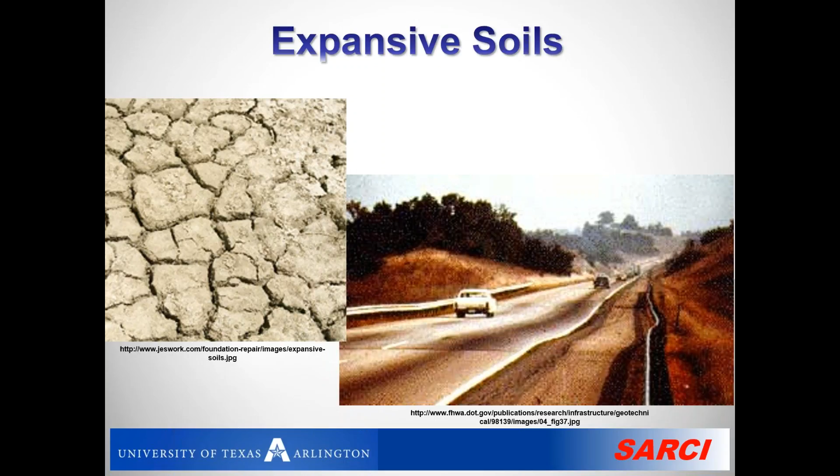There's one particular reason. They tried 2 or 3 times different stabilizations. Every second year, they had to go back and repair. So it's a big maintenance for the DOT and also local cities, because a lot of local roads come from that region there. And this one is from Middle East, but it's kind of common. Like in Dallas also, we have a lot of cracks in our homes.

In fact, there was a statistic I'm going to throw at you right now. In Dallas, if you look at the yellow pages, you don't have the phone books anymore, but still, if you look at the yellow pages somewhere, you'll find there are 60 plus repair companies in Dallas. And you go to New York City, you only have 2 or 3 people. So it will tell you how big a problem.

The biggest problem in Dallas is these foundation companies, they only have the company for 2 years, and then they say bankrupt, and then they go away. You won't even find them. So the guy who fixes your home, next year you want to go back because the problem came back, you can't even find him. He'll start with a new company again. So basically it's a big industry there. All this cracking, and anytime you have a crack, you lose like 20% of the value of the home sometimes. So it's a major issue.

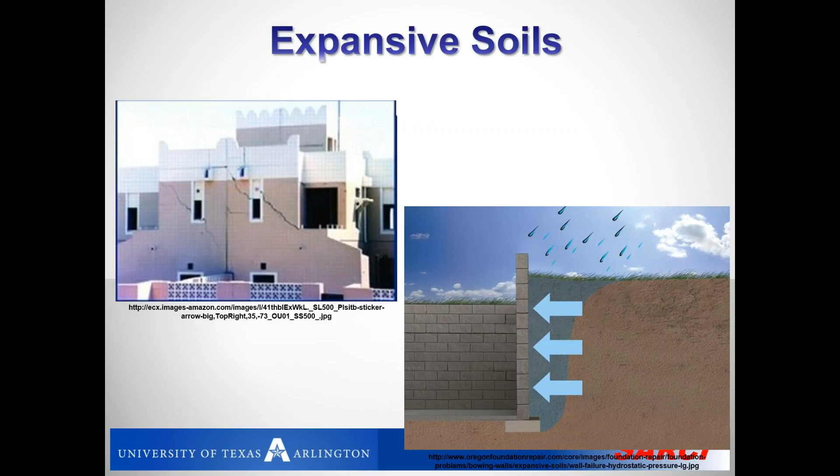And we deal with quite a bit of these home issues. And we also have the retaining wall. Sometimes the backfill is still expansive soil. If you have a cut area, you have a retaining wall that starts moving. And I'll show you a picture, and I'll explain how big this problem is. And this is all from our region. And I actually call them expensive soils, because anything you build, they're very expensive because of high maintenance.

This particular one is on I-30 outside Dallas. When this wall started moving due to this rain in the backfill, and then started swelling, the wall can only move in this way, so this interstate started buckling. And they had to shut down the whole system for at least a month or more than a month. Imagine one lane being shut down. You can see all the markings over there. This kept the traffic in the mornings for long lanes, and the amount of man hours lost is unbelievable. And this is common in our area. We have heavings like this everywhere.

And this is the area where I do quite a bit of research now also, the embankments or dams. First time when we get the rain, we have a lot of these superficial slope failures. And these are massive. These are not small ones. They actually take a huge amount of soil and then it comes down. And a lot of times they go back and push the soil. That's the only thing. It costs like $30,000, $40,000 to push back. In 2 years, again, they come back.

And a lot of earth dams, if you look at U.S. Army Corps, almost every year they have like 5 to 6 slides per dam in certain areas, and it's the ones where when you have a bad summer, you expect this problem pretty bad.

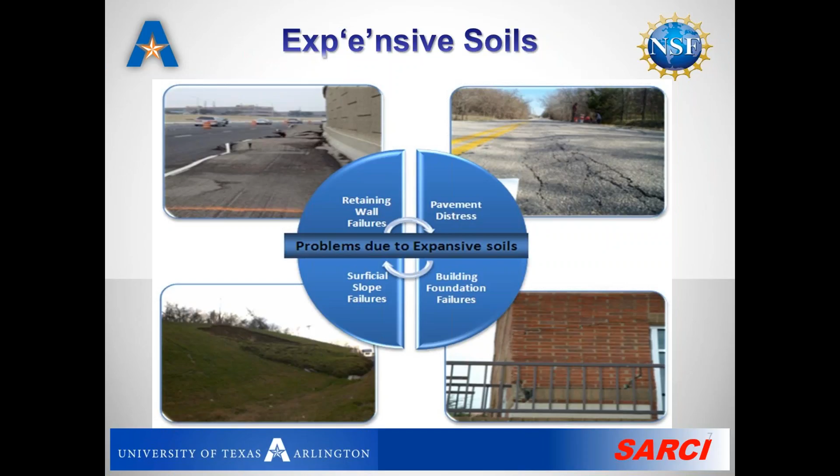And then this is again foundation crack. This particular building is a pretty new building. Within like a year, they have the cracking. So the damages from the pavement point of view, there are two types. The first one is, as I just mentioned, you have the roller coaster rides coming from differential heaving. Some area goes up, some area drops, so you have differential heaving.

The other one is this one, longitudinal cracking. This picture, I took for my project from TxDOT. It's Paris, not this nice Paris, but we have another Paris, I think my friend knows. And this Paris is pretty nice, but this road is actually four or five months old. You look at the cracking here.

We're talking about two inches wide, and we measured it just by poking a kind of a pole. We went down almost 1.5 feet. I'm pretty positive it went much deeper. This was during summer, extreme summer, probably sometime in July. And all along this are the trees. The water dried up and was taken away. The whole soil is cracking from the bottom up and started going up all the way.

And for this one, they had to repair it; the regional district spent quite a big amount to repair this road. And it's a pretty new road. It's a very common phenomenon here, having cracking coming from the bottom to the top.

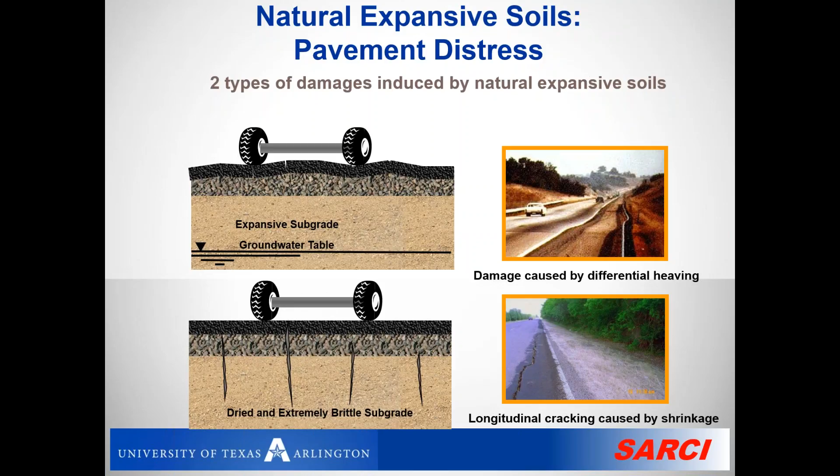So we were looking for solutions that are sustainable. We can show that if we provide a little bit of upfront cost, which is always a challenging role, can we try a new technique, a new material? Can we show you that the life cycle benefits are good, but more importantly, your maintenance dollars are less? So that's what we're trying to do. And I'm very fortunate. TxDOT has a good sustainability group. So everything that we do, they look for sustainable metrics. So that's where we actually address it.

In civil engineering, if you want to know what sustainability is, in these two fields we can directly identify it. Dams, energy structures, you can easily tell. But in terms of pavement geotechnics, it was a little bit difficult for us to explain what it is. But we are learning as we speak. And I was looking at the pictures behind there. You have the air pollution, NOx, and different things.

This is something I worked on with an air pollution group: every time I have a bad road and you shut down one lane, how much traffic air pollution, how many cars are idling, how many big trucks. I can calculate them and show a number, quantify how much pollution that's going to generate. They'll understand it. And actually it's helping me now to get projects.

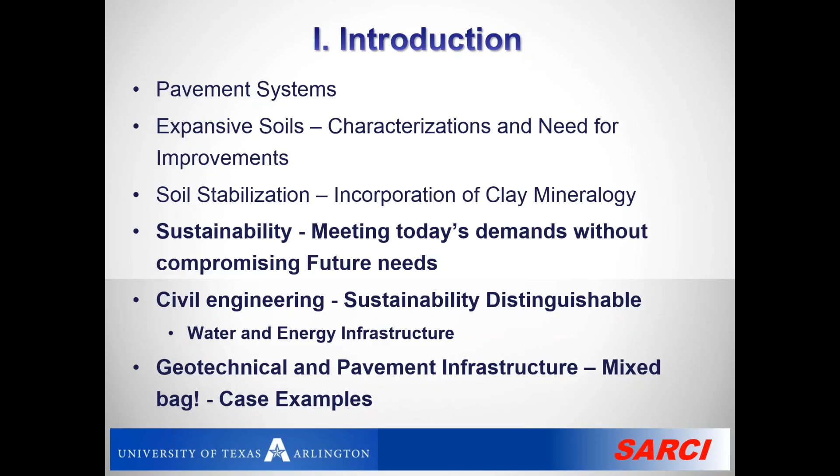So it's something you have to learn as we go, and I think some of you probably know. This is where in pavement geotechnics we need to show the benefits, and then we can get more projects. So the second item I'm going to start showing you, one of the first ones, is expansive soil underground. And this is a project we did. We looked at the expansive soils.

How do you know a soil is expansive? They look at the PI. They say high PI, soil is expansive. But I can show you some soils that are high PI that don't swell. So the PI-based characterization is really misleading. You can't always use the PI to indicate it, because soft materials also can have high PI. So what we did is we wanted to go a little bit more fundamental.

So NSF is the right place. We just completed this project last year. We tried to include unsaturated soil properties, which is the soil water characteristic. It's a study we did, and I'll show you some results here. So basically, instead of identifying it simplistically, only using PI, if I give them something much more fundamental, even though it requires additional testing, it will be much more sound.

So when I design a structure, I'm doing a couple of additional checks above PI. That will help them much more than just using PI. So in this study, we looked at the clay mineralogy, we looked at unsaturated soils. These things are already included. Pore size we also tried, and I'll show you a little bit of information on that.

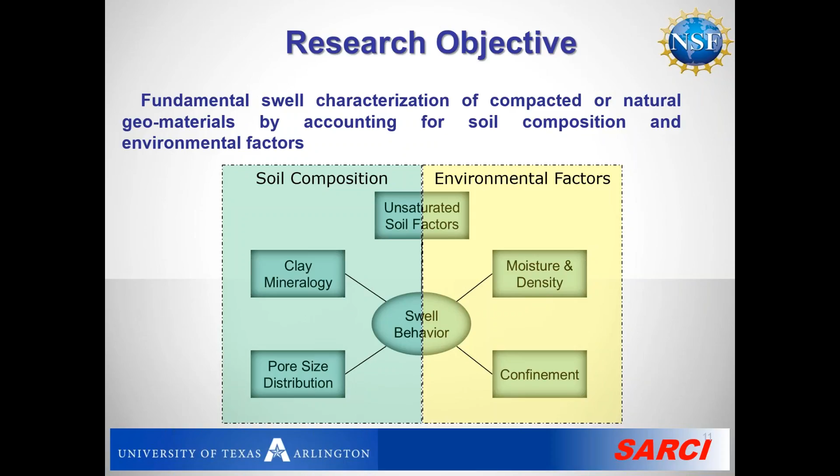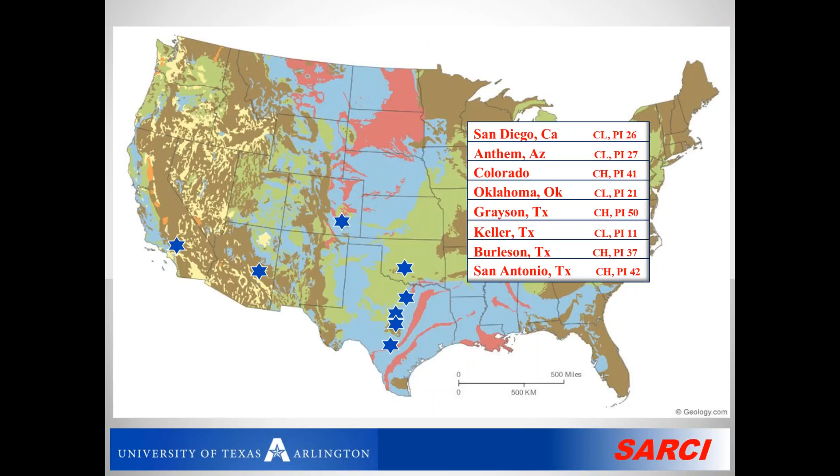Most of them are high plasticity clay. That means they have high PI. So we looked at them, and what we did is each soil we compacted and studied swell properties. Not going to go into swell testing, but basically swell properties are mostly swell strains and swell pressures. And then we studied SWRC, which is soil water retention curve. MEPDG has that soil water characteristic curve built in, so we use that.

And this is where we actually came up with some contribution to this field, clay mineralogy. Clay mineralogy I can qualitatively identify by doing XRD, but we came up with a procedure. Actually, it's Jim Mitchell's procedure, which Jim Mitchell has done in his soil behavior book. Most clays have three dominant clay minerals: illite, kaolinite, and montmorillonite.

And we try to do 3 chemical measurements in the lab on the soil to identify these 3 minerals, and that will add more to your soil behavior. It will tell you if you have a high montmorillonite, it's highly expansive. You don't have to do PI anymore. So this is where we added.

Then we also looked at the pore distribution, because moisture migration in the soil is a function of how pores are connected. And that's again a function of your compaction conditions. So we looked at all of them, and then we developed some prediction models. And I'll show you, these are more robust than what you do with the PI.

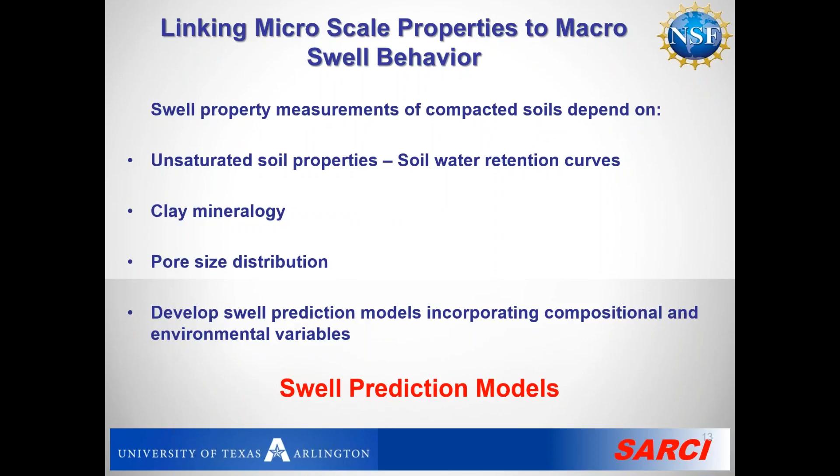So this is your SWRC curve, soil water retention curve. So basically, on this side suction is 0. That means soil is fully saturated. So you are at high moisture content, a volumetric or a gravimetric moisture content here. As you dry, desorption, you come to an area where it's very dry.

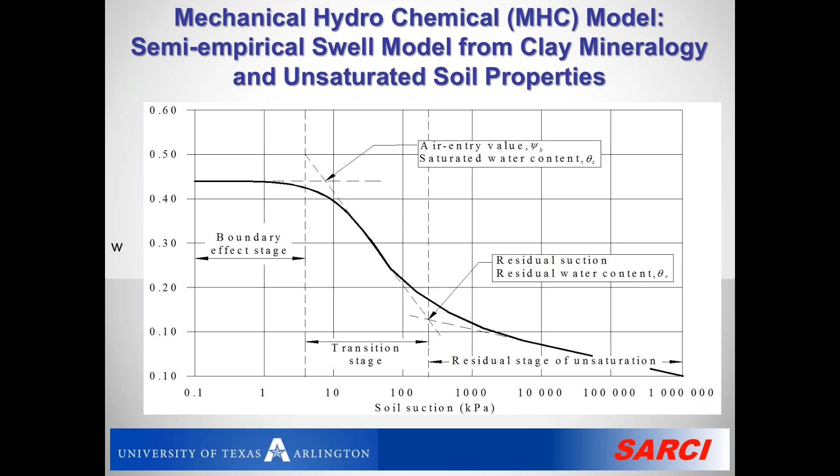In our subgrades, sometimes in Texas, we go around 10,000 kilopascals, which is a very dry condition. And that is when it starts cracking, and then all kinds of distress start developing to the top. So we use this as one of the characteristic curves. And the first model, what we did is we looked at this soil water characteristic curve. We got these numbers, and then we know the swelling, so we calculated moisture.

So we took the slope of the curve. So these are some of the 8 soils we tested. We didn't try to look at the dry path or wet path. We only looked at starting point and end point. I understand in between the slope is not linear, but we tried to simplify it. We just took a simple slope on a logarithmic plot. So the slope comes from the alpha parameter, which is similar to your consolidation.

And then we looked at the other model, C is clay. Every soil has a different clay mineralogy. So we looked at the clay mineralogy index and we came up with a parameter called C. And we multiplied these two to come up with a parameter called the mechanical hydrochemical model. This is a little bit complicated, but it's not that complicated in our opinion. It just measures clay mineralogy. It gives you better understanding of your swell potential.

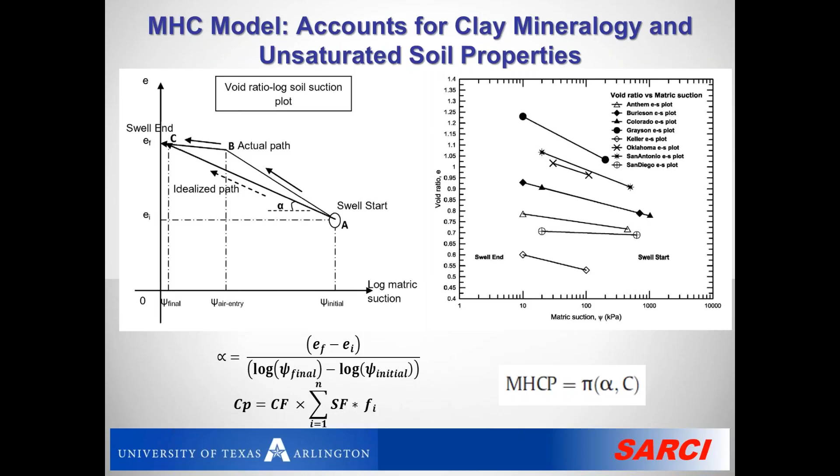So when we calculated, we compared them with our swell properties. This is the x-axis, our parameter we measure for each soil. This is swell strain. And you can see there's a nice trend how they are moving. So I can use this better than using PI. If I use PIs, I can actually easily underestimate or overestimate my swell potential.

Whereas this one is more fundamental because it accounts for your mechanical parameters, it accounts for hydro because your soil is unsaturated and it swells, and then it accounts for chemicals, which means your swelling minerals. So it includes all three, and all three are multiplied because they have not a cumulative but a product type of influence on each parameter.

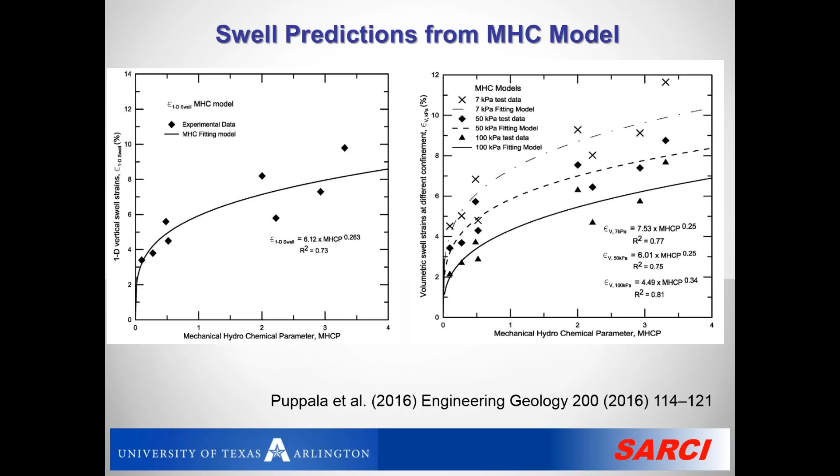So it came out very nicely, and we published this research on the topic here, and we showed both swelling and vertical swelling. We can predict very nicely with this, and it was a better model, and then we further calibrated it later. The next model we did is, when you have a good graduate student, you want to get more papers out of them, right?

So what we do is we try to ask him to do a little bit more additional work, and this is where we identified all 3 clay minerals, and you can see here each mineral has a different thickness. In the case of montmorillonite, it is known as the worst swelling clay. It absorbs so much moisture around each particle. So this is the amount. You can see how much is 400, right? Kaolinite has it, but it's not as bad as the swelling type because it's an inert material, so it doesn't have the same moisture attraction.

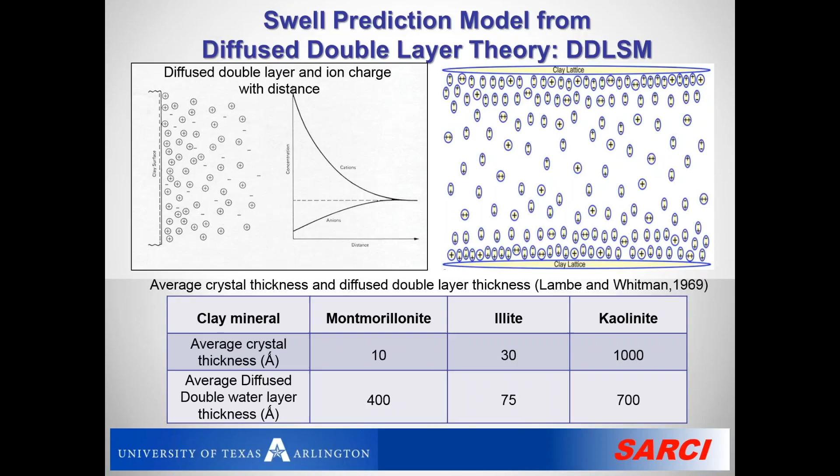So we went back and looked at soil. You have voids, take out the voids. You have solid particles, sand and silt. They basically don't have the moisture affinity, so we removed them. In the clays, we took these 3. Again, you may ask me, you have other clay minerals, why did you only consider these 3? These 3 are known as the dominating and more stable phases. There are other types of minerals. They are not stable. That's why we didn't include them. So we took these 3, and we came up with a model.

For each soil, we can calculate the percentage of kaolinite, illite, montmorillonite, and then I can come up with how many particles I have in kaolinite, how many in illite, and then to each particle I added the double layer thickness, and then I came up with my moisture thickness, and then I know the clay particle thickness, so I use this calculated amount of moisture that it can surround divided by the particle thickness. Basically, I took all the particles, their water layer, added them up, and then divided by the thickness of the soil.

That's what is swelling. But if you ask me, that is too high, how do you know each particle is going to get moisture? You're totally right. It's kind of hypothetical. It gives me the high amount. So the soil that has a high amount of montmorillonite is going to give you much larger water thickness. So if I compare it here, this is in the hundreds, whereas our numbers are in single to double digits. But basically, you can see the trend.

The higher these things, you're going to have higher swelling, because you definitely don't have all particles exposed or aligned to get moisture, but there is a direct proportional relationship. And we showed it from this research. All our soils nicely fit, and we were able to predict our swell. So this is really fundamental, but again, we showed them this is a simple Excel. All you have to do is 3 chemical measurements. In 2 days, I can get all the numbers. Typically, PIs take me more than a day also because you have to dry the soil. And by adding an extra 1 day, I can get much more meaningful information that I can use to characterize them.

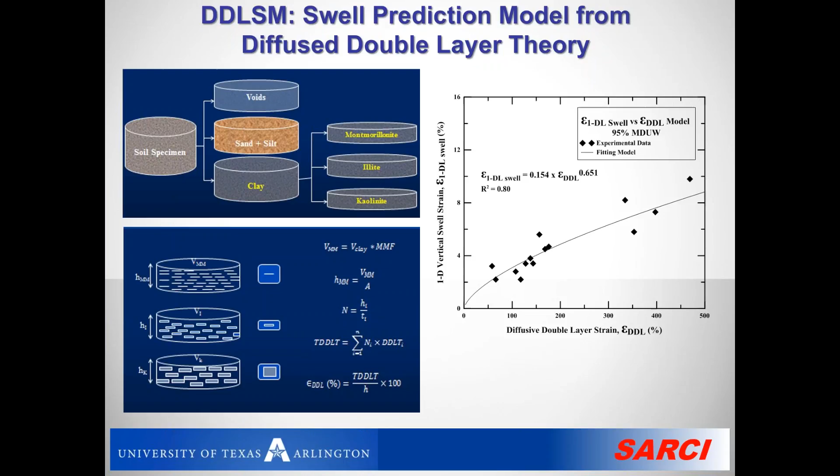Then we wanted to be a little bit fancy, so we went with some CT, computed tomography, and we tried to look inside the soil because compacted soils have a different pore structure, how they are connected. So we first looked at mercury intrusion porosimetry. This is our geosciences lab. We were able to flush mercury into the soil. It's a little complicated, but at different pressures, the amount of mercury passes through. So it gives me the pore diameter versus every pressure you apply. Basically, it gives me the different pore sizes inside your compacted soil.

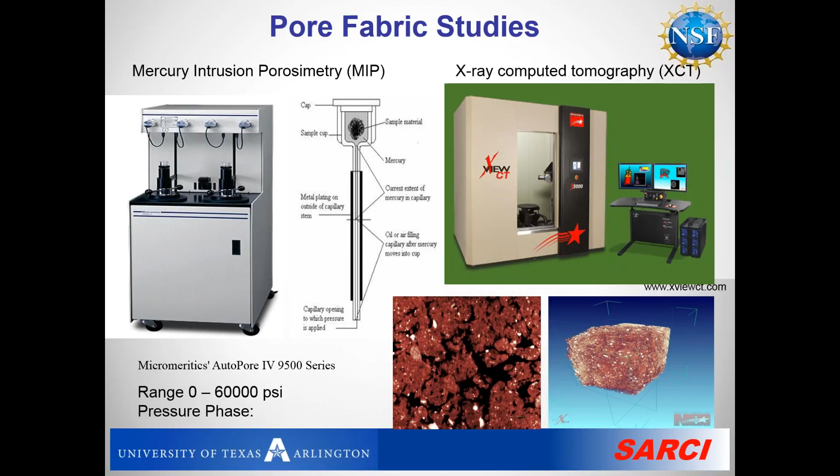And this one is your tomography. You do it for asphalt. Basically, it will give you the structure. Inside, we can slice it wherever you want, and I can get how much pores. With image analysis, you can get that information. So we did this part. If you look here, this is our pore structure. So we calculated the amount of pore.

Basically, we calculate something called surface area ratio. The total pore area we can calculate from our mercury intrusion porosimetry measurement, because in each soil sample I can tell how much micropore, macropore, and mesopores. Once I know it, I can estimate the amount of pores. And then if the water is filled in the pores, assuming the soil is fully saturated, the water is only exposed to the surface of the clay minerals. Only the surface touches, okay? So we took the surface area of the clay minerals and divided by pore area, and then we got an approximate ratio.

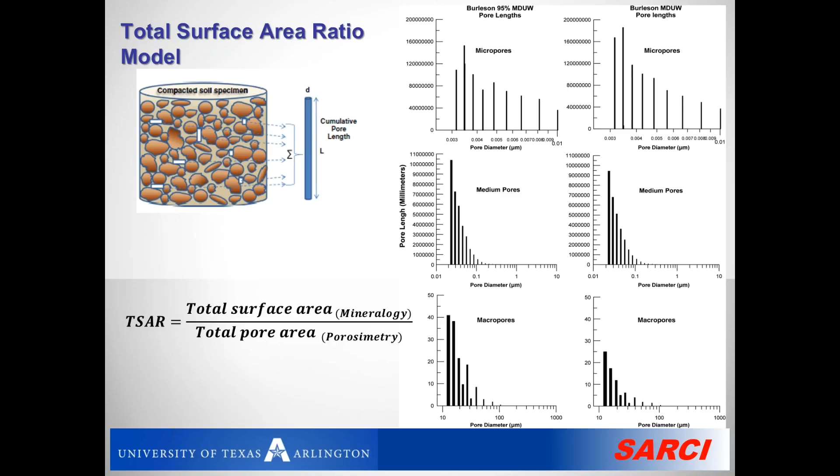And this ratio, we thought it has some relationship. We didn't know it's going to be this good, but we did the surface area ratio, and you can see the swell has a nice relationship with them. And we did it at 2 different compaction densities, and both of them actually worked pretty well. And this paper was published actually last year in the ASCE journal.

Again, this is clearly, if you do a little bit extra work, you can do a better characterization than build something based on a simple lab PI test, but then you have a failure, you come back, okay, I missed that soil is too expansive. I didn't know it, it happens a lot.

Believe it or not, at UTA, we get a lot of forensic work. We get a lot of times, say, hey, I have this pavement failed in 6 months. Can you go and test it? I had to test it for sulfates. I had to test it for all kinds of things, to see what caused the problem.

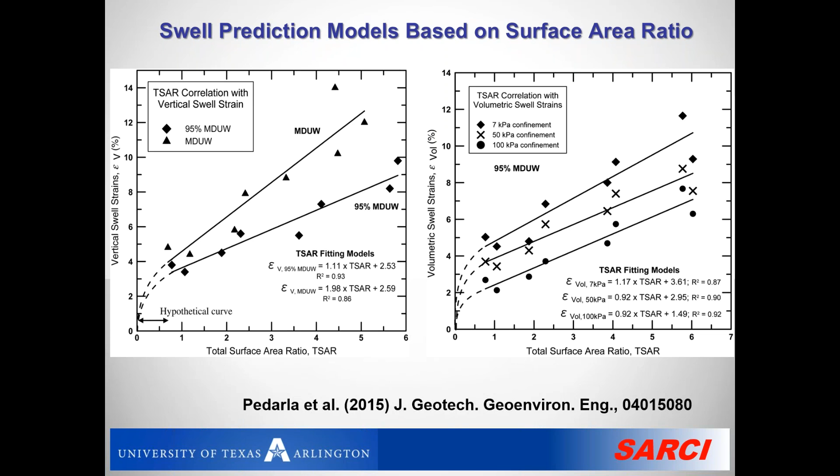And I think, if we explain this to our public agencies, DOTs, the importance of this thing, they can see it's not going to be too time consuming. It is probably a little extra money, but it will help you with your design, okay? So basically these 3 models, we were able to do it, and we have published quite a bit on this, and we are waiting for one more. So it's a fundamental based type of study from NSF. So we are advancing how to characterize soils better.

The next thing we did is soil stabilization. This project came from TxDOT and we actually worked with another university, UT El Paso, with Soheil. We did this work, which is soil stabilization, but we tried to include a more rational design than using PI, because we know from experience, by having a survey we did with all the districts, what works in one district doesn't work in another district.

So these guys say, okay, I have PI of 25, I can use lime of 6%, and the other guys say, hey, I did the same thing, I have PI 25, but my soil prematurely failed. So we went back and looked at it. It's because the soils are not the same. Again, same reason, expansive soils, and then this is their design. They look at the PIs, they come up with this thing, and then they do the mix design, and from the mix design, they include the stabilization. But it's all based on PI, okay?

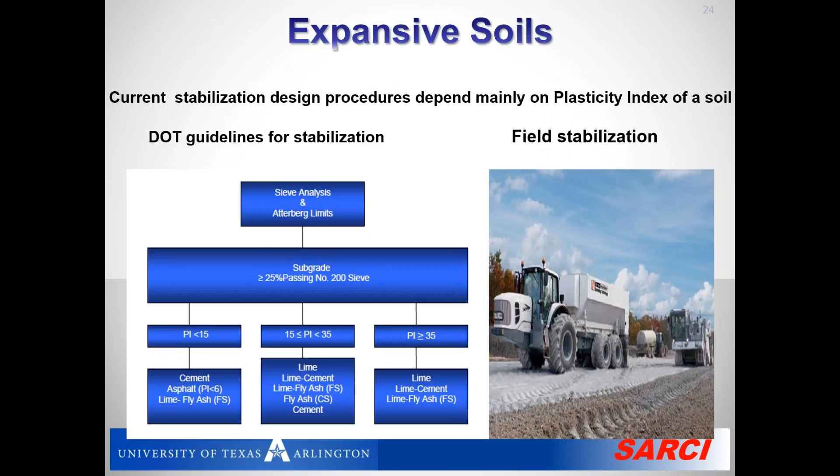I can show you 2 soils with similar PI. They are 2 different materials. One soil may have more swelling smectite than the other soil. And that means if you have too much swelling soil like smectite, it won't work in the field. But if you have illite, it works in the field. So the guys in that district have more illite material. They're saying we had no issues, it works very well. But the other district is having a lot of problems because the geology of their site soil has more smectite. They both have the same PI, but they're totally different animals. So we try to tell them it's not something simple.

So initially when we proposed it, we were very happy because TxDOT chose us, because we explained we're going to include some chemical mineralogy. And some of the time they were asking whether this will be interesting, will it be too practical or too academic? We said it's not too academic. It can be practical because it's going to help your infrastructure. So we convinced them. Again, this is the picture I was talking about, the cracking we have, and this failure of this area.

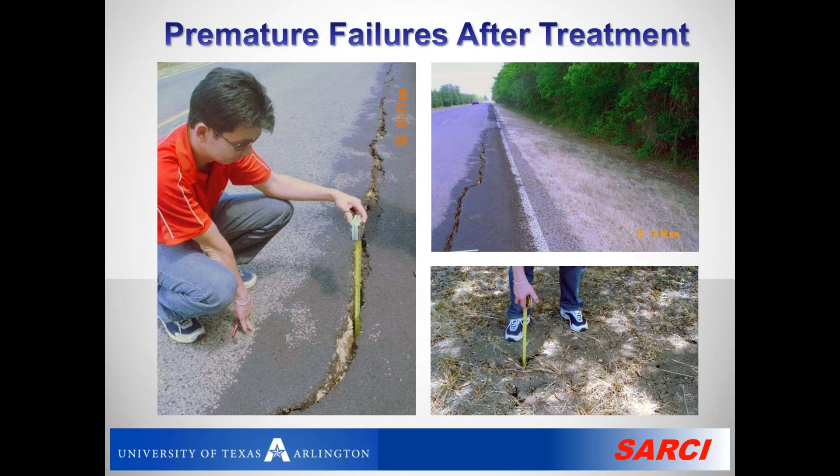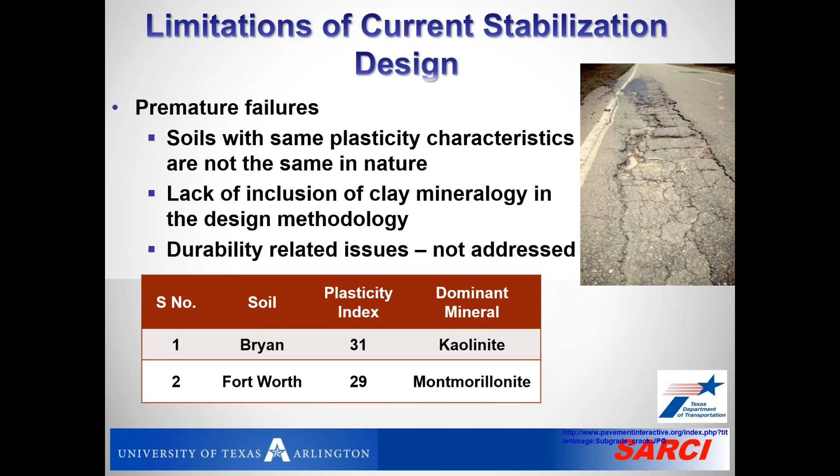These 2 soils have similar PIs, almost similar, 29 and 31. Look at the dominating mineral. Bryan, which is close to College Station, the Texas A&M campus, they have kaolinite. So their roads are pretty okay. They don't have a lot of undulation. In this area, Fort Worth, on the west side of our campus, we have a lot of montmorillonite. The PI is low, but still our soils in this area, if we use the same design, it doesn't work. So we use this as a premise, and then we come up with the durability performance design, and I'll show you a little bit about this.

So what we did is we took the soils from districts in Texas, and then we first identified for each soil what is their mineralogy. These are the three chemical measurements I was mentioning. CEC stands for cation exchange capacity, which is a simple gravimetric step-by-step test. Specific surface area.

If you give a soil, I can tell you how much surface you have. And the specific surface, if you have high specific surface, if you have smectite, it's bad, because your smectite is what you call montmorillonite, which has a high moisture pulling capacity. So it will hold a lot more moisture. So if you put specific surface area and then clay mineralogy, you give me two soils, I'll tell you which soil is better, which soil is not good. Okay, and that's the way we use these two.

And this is total potassium. This is the hard test, but we have to use this test because this directly gives illite. From these three measurements, these three unknowns we measured, we came up with a neural network model, and it actually is Excel-based. We input it. We try to eliminate this because this TP requires some kind of hydrofluoric acid, which is not easy to do in the lab because it requires some special permit. So we try to come up using these two with the dominant mineral, which is montmorillonite. All I'm interested in is what percent is montmorillonite. If I can find it, I can tell you how to improve the stabilization.

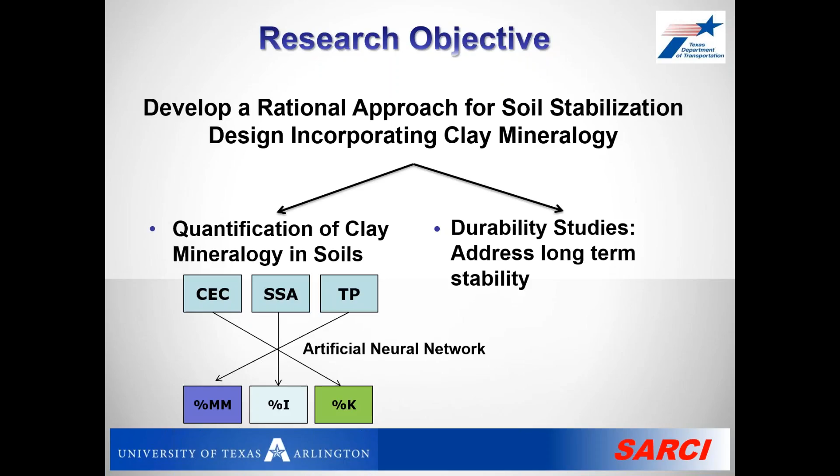So using this, we went back and did the lab testing. So I'll show you some durability testing. All the stabilizations were done by the TxDOT method. Then in our region, it's wetting and drying. You may do freezing and thawing. But sometimes I feel in North Texas we should do all four, drying, wetting, and freezing and thawing. So that's going to be a new durability test we need to do, because believe it or not, we do have some snow days. So we get a lot of freezing too.

So each time you soak it and then dry it in the oven and then you measure it. So what we do is at different cycles, we go back and measure the strength. And then we try to bring them to the same moisture level at the time of testing. So we get how much strength we have after every cycle, we look at them. We know the initial strength, and we know the strength during the durability. So we know whether we are retaining or losing strength due to this durability.

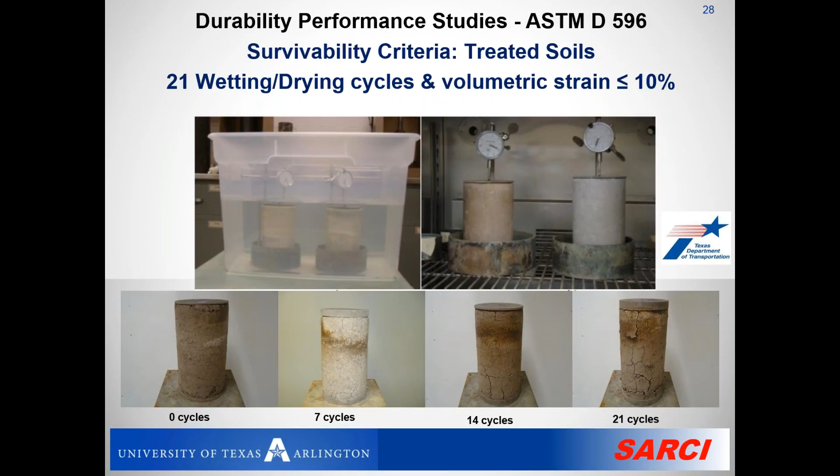So one reason why we did this: if you have high smectite, you're going to have a lot of cracking, right? So that soil is going to disintegrate very fast. And that's a good indicator. So I can show you a soil that has montmorillonite. If I do a PI-based design, it's going to disintegrate very fast. And we observed that in our lab testing. I'll show you in a minute. So this is one of the soils, Austin soil. It has high montmorillonite. When I say Austin soil, it's from the Austin district; they provided it.

So the first thing we did is we went with their design. 6% lime is used. And what you see is the untreated soil, after one drying and wetting, collapses. So untreated, it survived only one cycle. Treated soil, we used 6% lime. It survived up to 12 cycles. After 12 cycles, the sample failed. Okay, so up to 12 cycles. So we know the TxDOT current design is not sufficient. So we tried to increase the lime to 8%. It met 21. It worked fine.

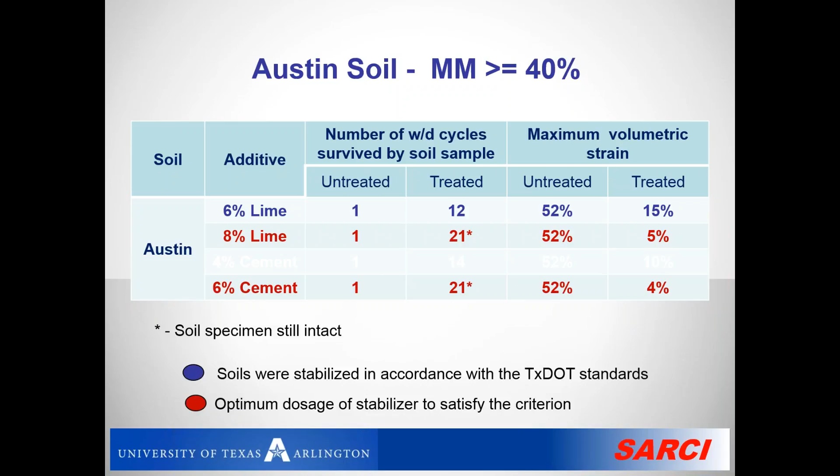And when we tried cement, cement actually gives you higher tensile strength or higher unconfined strength. So it has a very high cracking resistance, what we call shrinkage cracking resistance. So cement actually worked very well. So this is for Austin soil. This is the Fort Worth soils. Again, we have shown it.

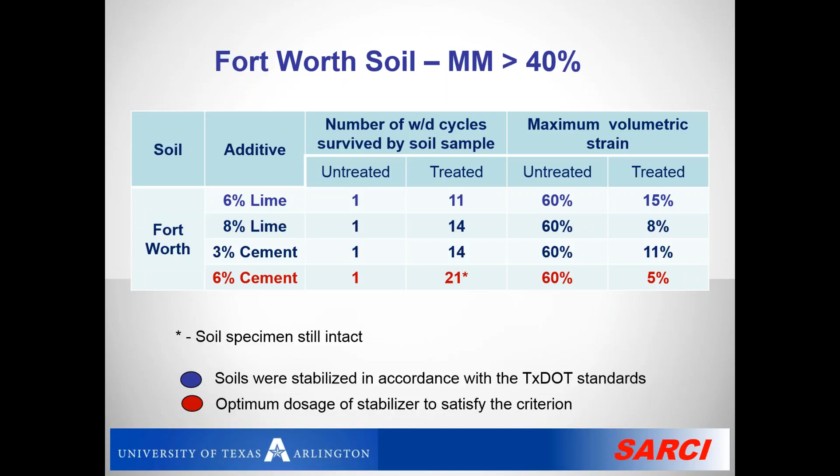In some cases, when you have a certain amount of montmorillonite, even after you increase the lime, it did not work. So lime is not a good fit for that. You really need to do performance testing. You can't just say, okay, all the soils with high PI, you should go and use only lime. But lime may not work for that soil, because you clearly saw, even when we went from 6 to 8, 14. If I go up to 10, probably it makes it. But most times we limit at around 8%, though we can go a little higher now. But with this one, cement passed the criteria. So cement is the one we designed differently, and it actually worked well.

So when we did all the tests on all of our soils, and I'm highlighting some of these materials here, we clearly looked at the trend, how much lime we added, how many cycles they survived.

Our goal is the one that at least meets 21 cycles stable. 21 is just a randomly chosen, it's a long term, but I think a lot of times people use 14 cycles, so we try to go a little bit factor of safety with a high number of cycles. So anytime you have high montmorillonite, that soil failed with lime. But if we are below 40% montmorillonite, it worked.

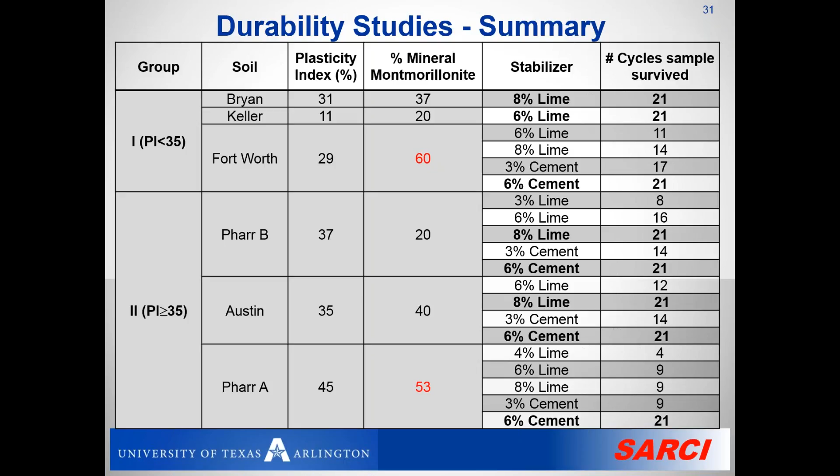So what we did is in the end, we came up with the design. We showed them if you have a PI less than 35, if you have less than 40, go with the regular design. It doesn't have an issue, because whenever montmorillonite is less than 40, it's not too expansive. It works okay. You will find a good design with lime.

But anytime above 40 or high PI soil, we're asking them to increase lime more. Definitely 8% is not sufficient in some cases. You will have to go to 10 or 12%. So what the folks do is, the PI in this case is 29, 30, they use 4 or 5% lime. They look at the PI, they don't even do mix design. They directly use the 5% lime.

With 5% lime, within 2 or 3 seasonal wetting and drying, we're losing it. The soil is cracking, the first rain is flushing, stabilizer is not holding, so we have a quick loss of our durability, and it's not working. So this is where we mentioned the design has to go beyond, checking the durability testing in the lab and then do it. So we recommended them.

And in some cases, we even said you have to probably consider cement. Cement is not a normal approach for soil stabilization in our region, because most times we use lime for expansive soil treatment. But believe it or not, cement actually worked good on very extreme cases because it really provides high unconfined compression strength, which is when the soil wants to dry, this tensile strength will help with cutting down the cracking.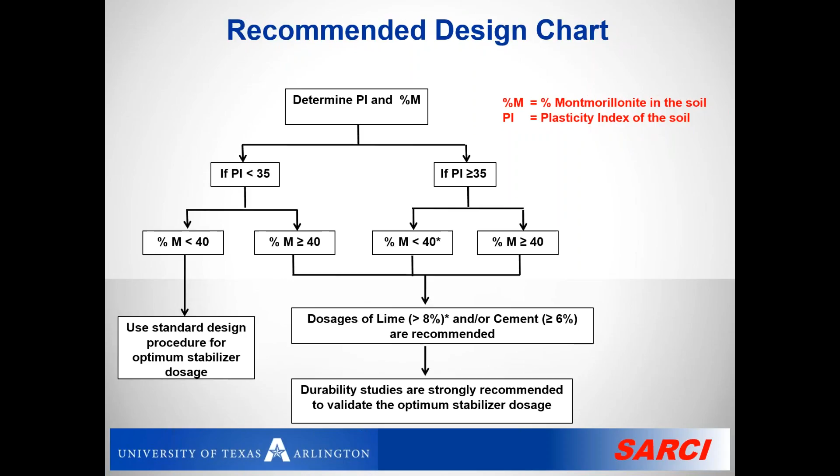So in our study, we are showing that fundamentally understanding the soil constituents, and their role with respect to moisture, will help you a lot with the design. So this is our recommendation to TxDOT for soils that have a high amount of them. And we published these works also in different places. I suggest if you are interested in mineralogy, please look at this paper.

With this paper, I was talking to Professor Imad in the morning. He was mentioning Jim Mitchell. Jim Mitchell is my source of inspiration. My advisor, Yalcin, is a good friend of Jim Mitchell. So we were using a lot of his soil chemistry and soil behavior book. We still use them. In his book, he actually talked about it. When we developed this, Jim Mitchell quoted our work quite well. In fact, whenever someone has a sulfate problem, he even refers them to us: you should talk to Anand. So we are very proud. He's our source of inspiration for understanding soil chemistry.

And I can relate this to the fines also. You always study fines in the bases. The fines, and what the fines are made of, will tell you how your aggregate base is behaving. If you show me fines that are more kaolinite based, I don't think there will be an issue.

But if you give me a fine that has more montmorillonite in your source rock material in the ground, years back when it started disintegrating, that's the thing that can contribute to the poor performance of your aggregates. So this is something you now see in a methylene blue test, which is actually an indicator for montmorillonite. So that's the way you go into understanding the science behind it.

So I'm coming almost to the end, to the sustainable aspect. Again, as I said, we have to explain the sustainability part of it. In geotech, these are some of the areas you may hear. Pavement is definitely a big one now. But ground improvement, I can say, sustainable ground improvement is a big topic here. But most times we do material reuse and recycle, which is the big sustainability part of our work.

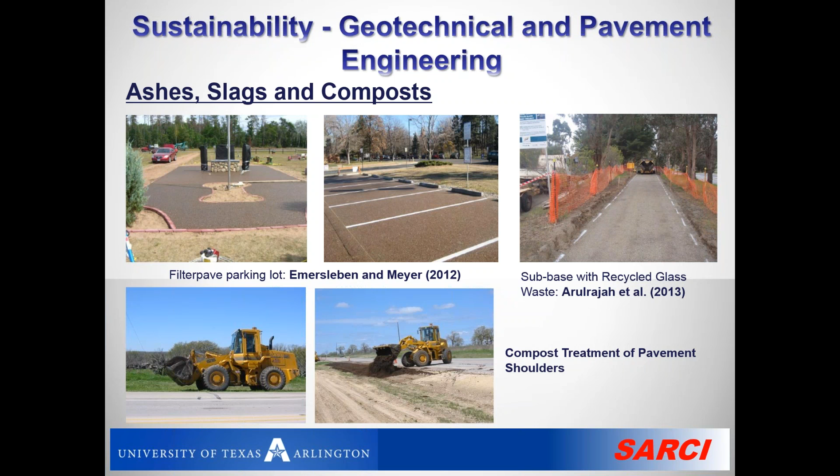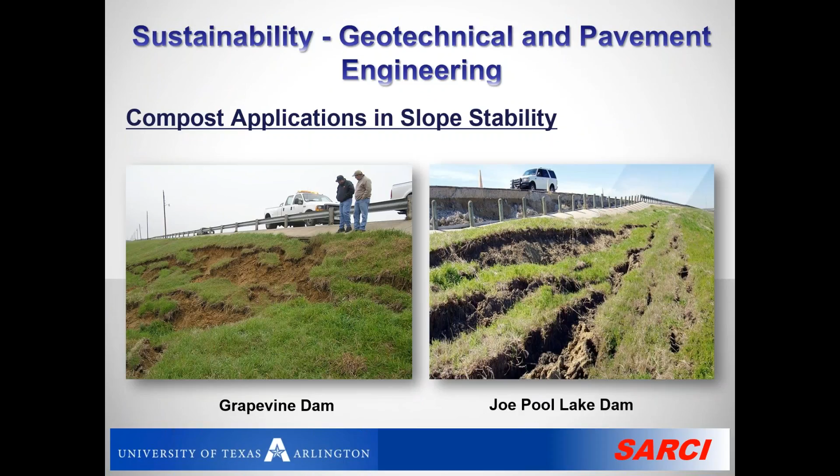Okay. The only area where it didn't work is slopes. We tried to put the compost in the slopes. The rainfall washed away all this because this material is very light, so they all came up. So we did not find compost amendment on the slopes, did not find any positive effect. So we have some cracking. This is not the compost section, but I'm saying we tried to use it here.

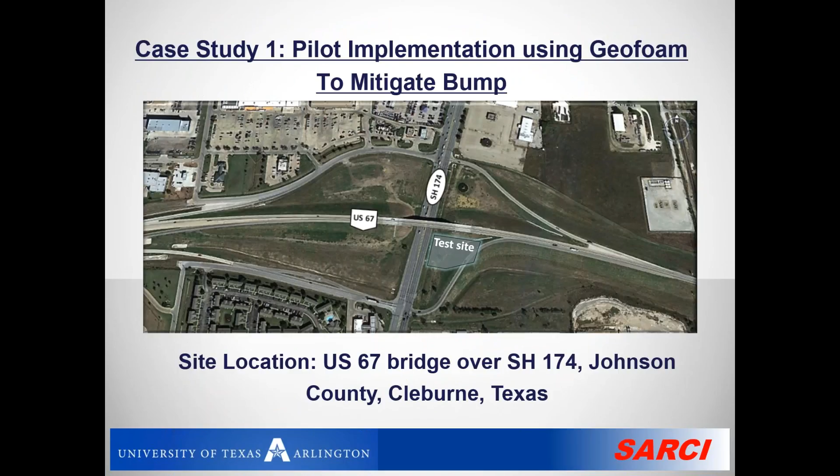So let me show you the first case study. This is the one I think Erol has done some work with the railways on the bridge bump issue. We have a 4-year project with TxDOT. We have looked at different materials for embankment, lightweight embankments. So this particular thing I'm focusing is US 67 outside Fort Worth, State Highway 174.

So if I show you, this is the bump. Bump means anytime you have a approach slab reaching your bridge deck, you have a differential settlement. And sometimes if it's 1 inch or even when it crosses 2+ inches, you have to repair it. That's where the bump is. And we have a lot of bridges, a lot of high elevated bridges, 50K, and then 25% of them have maintenance. In 2002, this number is much higher.

So every time you repair a bump, you have to put urethane or different techniques to raise the slab. That is a very expensive solution. Again, every time you have a repair, you have to shut down, again, urban mobility. So we found out a lot of times, not all bump issues, but the significance of a bump issue in our region actually affects the public perception about the road, and also a lot of repairs.

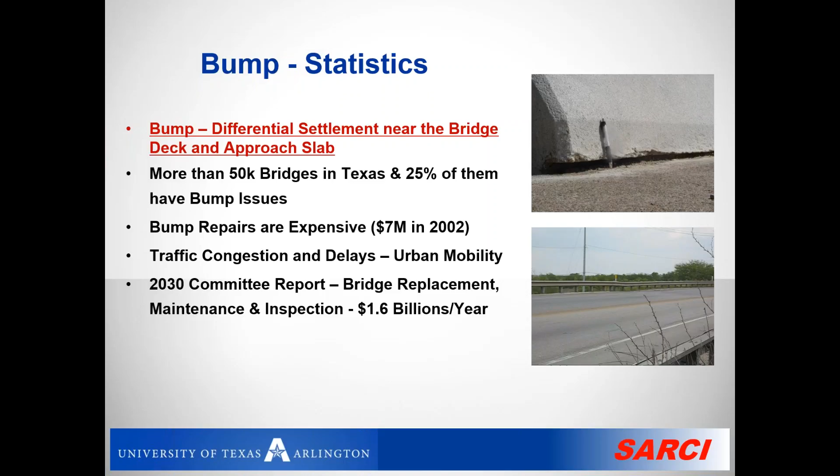And the one I'm just going to focus on is this one here, US 67. In almost 16 plus years, they have 16 inches settlement. So every year, 1 inch settlement. The embankment there is close to 40 feet high. The embankment is compressing. And then underneath that embankment, you have a natural subgrade that's also compressing. So every year you have 1 inch. Every 2-3 years, they had to go back and stop it and repair it.

So they tried different techniques. None of them actually stopped it. All of them, in 2 years, again, the 2 inches came, and then again you had to go back and repair it. So this is the picture of the thing. This is the amount of settlement, 16.5 inches, okay?

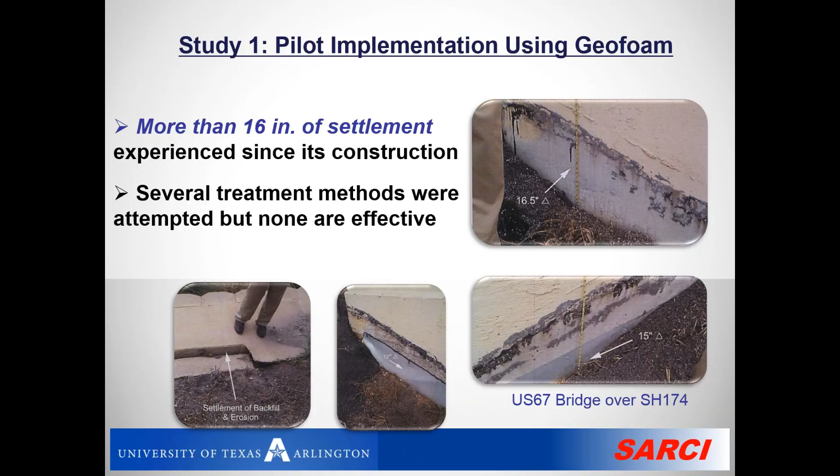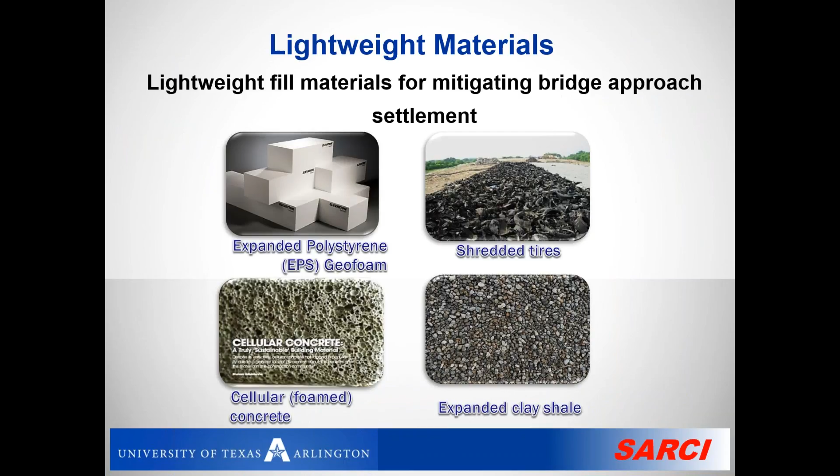And a lot of times what they do is overlay. Overlay is not a good solution. You're adding more weight to the structure. It actually increases settlement. So we looked at some of these lightweight aggregates. So we were asking them to use expanded. But these are expensive compared to the fill. Fill is like $1 per cubic yard, whereas this is $50 per cubic yard. So that's very expensive, almost 1 to 50.

So we did a lot of analysis, and we explained them. Look at the numbers. Geofoam has the weight of 0.75 to 2, which is 1/20th, much smaller than the soils, which is 100 pounds. So we are reducing significantly. It will cut down, but when we do the geofoam, we don't want to do the whole embankment. We only want to do a small 1/3 of the height. The whole height is going to be very expensive. It's not even practical for them.

And we convinced them on this particular section, which has so many problems, and I had to spend at least 2 or 3 meetings explaining to them. I almost became like a salesperson for a geofoam company. Can you imagine a professor going and doing marketing? But it's important. Sometimes you have to explain to them.

So in the end, you tried so many things, why don't we try? So the area engineer said, yeah, let's go for it, and the district engineer bought into it. So we built a hybrid embankment for the first time.

So we didn't take the whole thing. If you look in the literature, they put geofoam from bottom up, all the way from the bottom to the top of the road, all right? Whereas we did only, if you look at it, this is a big embankment down, only the top 10-plus feet we took.

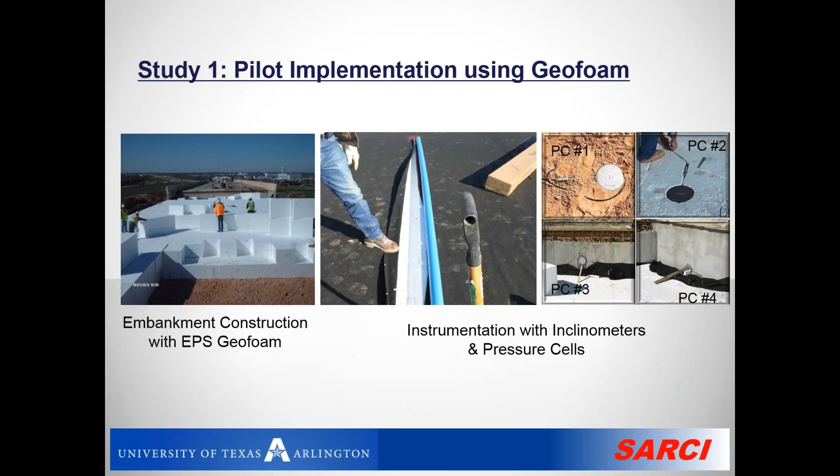So this construction was done in 2 days. You can see the 2 people going and placing. Let me show you these pictures here. So this is basically construction. See the people carrying and then blocking, and you have to make some shape adjustments, and this is the connection plate, so there's no friction or movement.

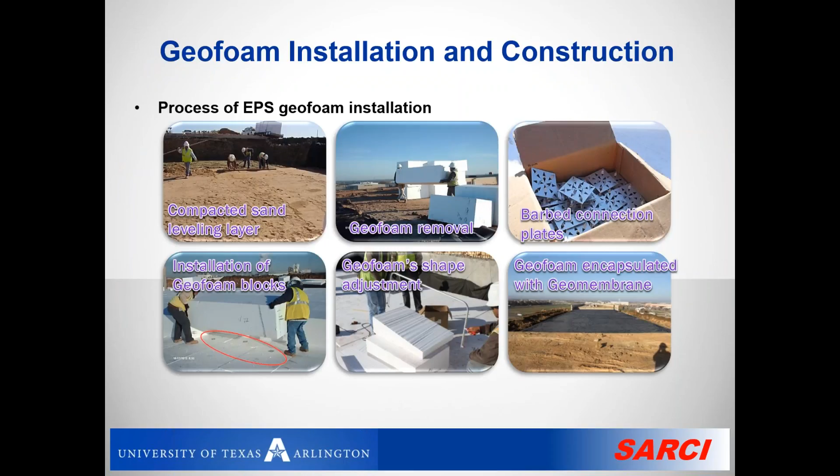So we prepared everything. We have closed it with the geomembrane on the top. You don't want this material to be exposed to the oil leaking from your trucks, okay? So you have to cover them up. So you need a wrapped system. And then we instrumented this section here, all kinds of pressure cells and inclinometers going from one end.

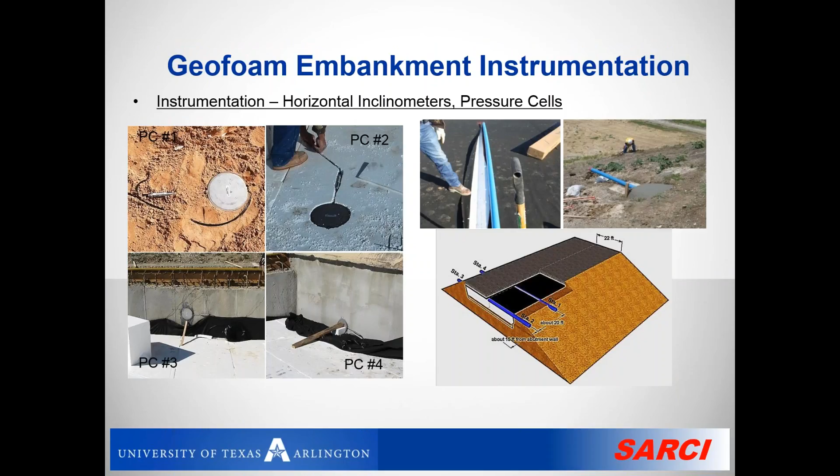So basically we collected the data. We have been collecting the data even now as we speak. And if you look at it, 3+ years now since we constructed it, we have close to around 1.5 inches or less. And most of it came during construction, the placement of these foams. Right after the foams, we put the base on top, and then you have the upper layer. So most of it came then, but in the last 3+ years, I'm waiting for the first overlay, probably 5 years or 6 years or even more.

They already see big savings, because by now they would have stopped at least more than once to fix it, and they are very happy. And actually, they consider this an innovative solution. So the TxDOT research actually identified this as one of the innovative technologies.

Again, this is not the first time. This is not something I did first. This is a solution that's already there in Europe. They use it for high-speed trains and all other embankment systems. Even in the US, if you look at the Salt Lake City Olympics, they did a lot of geofoam embankment systems. So we looked at this literature, we used this information, and it was proven to be successful.

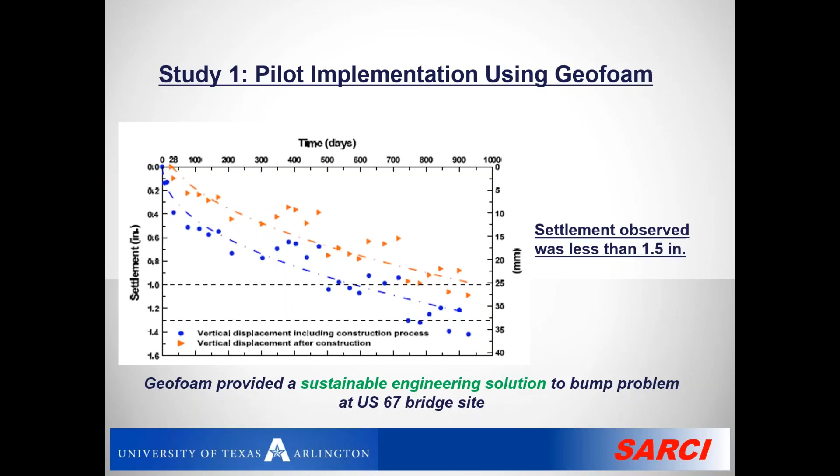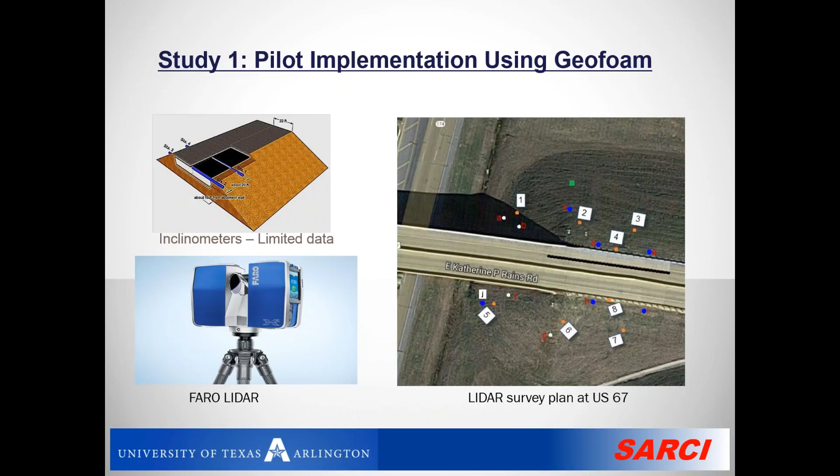Right now we are trying to monitor away from the site. We got a new LiDAR system, so we're trying to do everything outside, so we don't have to stop, we don't even have to go close to the traffic. And this is working out very well, because we are able to get very fine 3D point cloud data. I can use that to get any point I want to measure. I can tell what settlements I have. So it's coming out pretty well. This is some of the data that we just showed recently.

So this work was pretty successful, and we have another project coming up, because when a good solution comes, you always get more projects. Everybody wants it, right? So we have more research. The challenging part is the new one is going to be at the bridges where you have a high water table. So we'll have to see whether that's going to cause any issue.

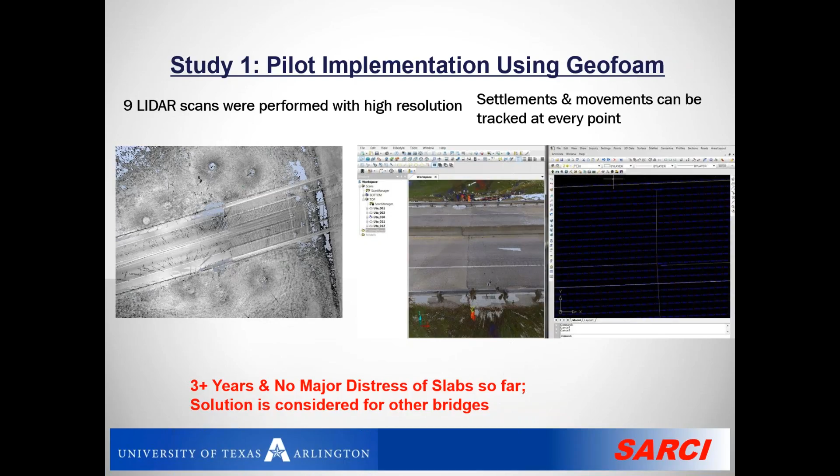Because this material can float, how do we anchor it so that it will stay? So it's a little bit challenging design, but we're already looking at how to design them, and they came up with the geofoam solution, not that we had to go and convince them. So we are very happy. We just have to show them how it works.

The last case study I'm going to show you is a pipeline. This is a little bit away from DOT, but this is a major pipeline. We are expecting huge growth. In Dallas, you have the pipeline bringing water from Lake Palestine and also other lakes here. And then the water is coming to Dallas. So you have Dallas City here, and then Fort Worth here. The Fort Worth Water District is actually doing this, and now the City of Dallas has joined hands.

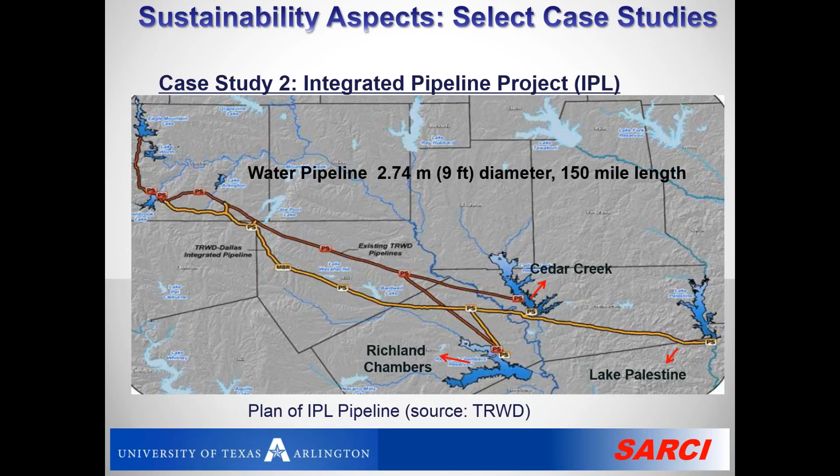Okay, so this is where all the water is coming from. And it's a big water pipeline. It's 9 feet in diameter, and it's 150 miles in length. It's huge work, several billions of dollars of work. So the challenging part is it's crossing different geological formations. Each color tells you a different thing. What you see here is Eagle Ford.

If you Google Eagle Ford, it will tell you it's one of the nastiest clays in our region. Eagle Ford material is known to be highly expansive. So in this area, this is all buried pipe, in a lot of places 10 feet under the ground. So at 10 to 15 feet, you remove the soil, you put a 9-foot pipe.

Where are you going to put this bad expansive soil? Are you going to dump it in landfills? It's going to cost you more. And some of these locations are in small cities, so the roads are not designed for heavy traffic. How do you design them? So we tried to show them: can we look at material reuse? Can we look at the excavated materials, and can we reuse them as a fill for the pipe?

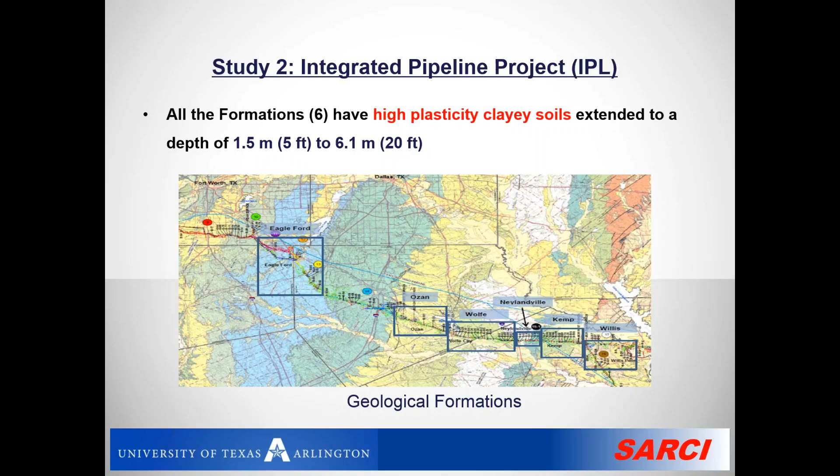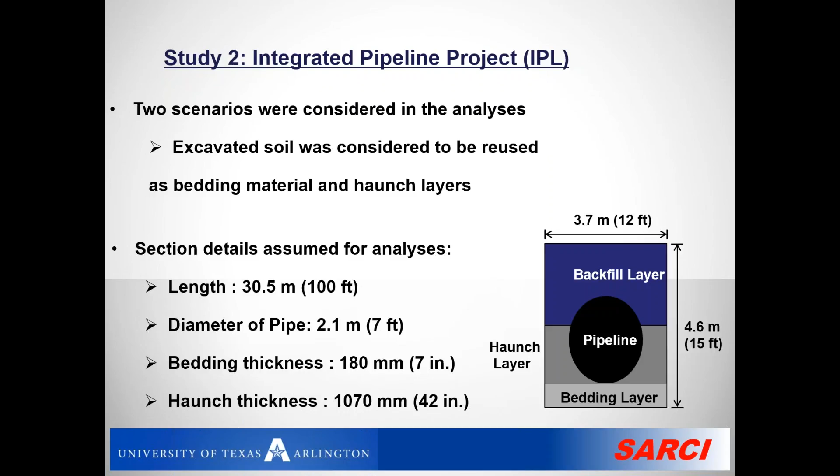So we looked at this as a CLSM material. We remove the soil, look at it, and see whether we can combine it with some stabilizers and prepare it as a controlled low strength material. It's flowable, so it will flow around the pipe, and with time it will consolidate and become rock. It gives good support for the pipe. We know what properties are required for the pipe, so we use that as our basis, and then we design the CLSM material. CLSM is, again, a controlled low strength material. It requires cement, fly ash, water and native soil.

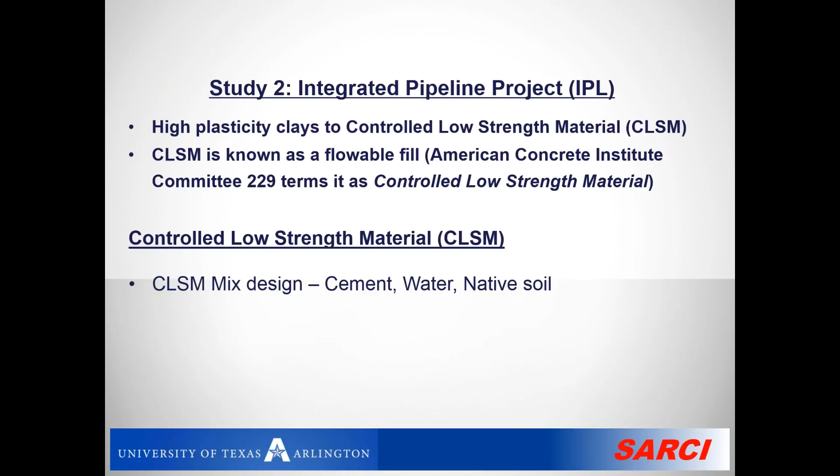When we started, they mentioned that CLSM is typically fine sand or silts. Mostly clays, particularly CH material, are not used. We knew it was going to be challenging because the material should show flow, and at the same time it should gain strength within hours. On one side, when you put it like this, the material should flow nicely. Then when it comes here, you want it to become like a rock. How can you have those two? They're two extreme conditions, right? We can do it with CLSM design, but doing it with the clay was challenging.

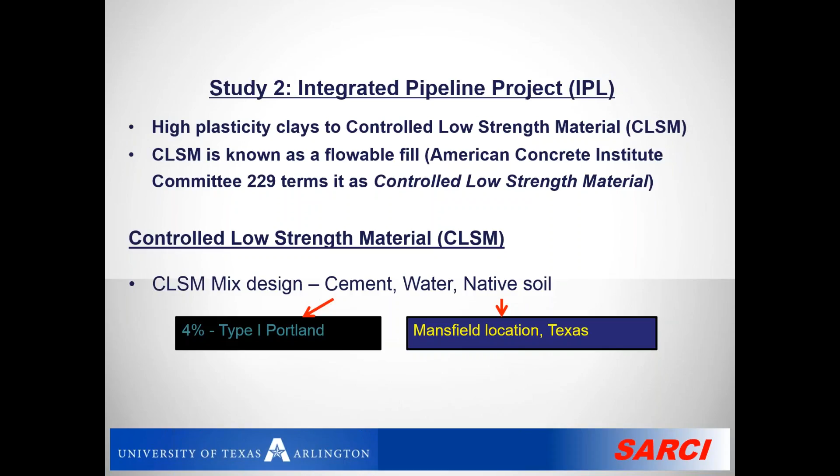So we were looking at different types of additives. We looked at cement and fly ash. When we did this project, they wanted us to do the lab design first and then demonstrate in the field, and we were able to do both. I'll show you the picture. In the lab, we came up with the design, and there are a couple of papers in the ASCE Journal of Materials. I'll show you in a minute. The challenging part is demonstrating in the field.

But the contractor was very creative. He said, this is not the right shredder, I'm going to bring a new one. The next day, he brought a different one. He was able to cut it fine, pulverize it, and then mix everything. And you can see this is the flowable fill being placed. This is the flowable fill placed around the pipe. And it worked very well.

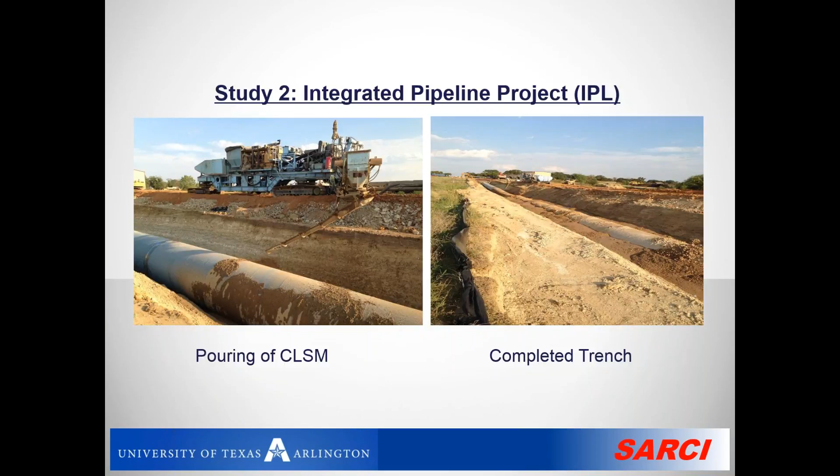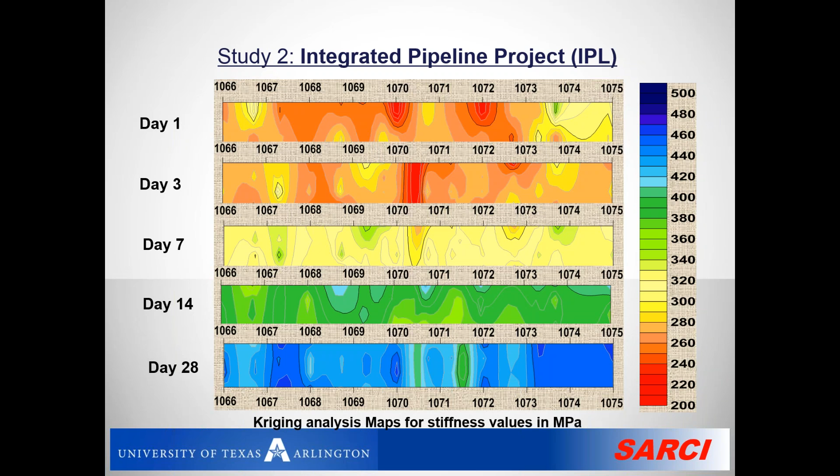And we actually did a lot of non-destructive tests on this. We did spectral analysis of surface waves. Our guys went down all around the pipe, taking SASW stiffness measurements. So I'll show you some of the data. Right after placement, you can see the stiffness, when it's wet, is somewhere over here. Within 7 days, we are in this region here. At 28 days, we have pretty high stiffness. So you've got a material that's pretty strong now. We clearly showed how it can improve the stiffness very quickly.

This is, again, for the pipe. You can see all the blue around it. That's what they want to see. So it's working very well. We showed the calculation. If you reuse the excavated material, it costs you $12 per meter. We did a small scale. For carbon footprint, you don't have to bring material from outside, no quarries, no trucks coming and going. So 0.01 metric ton per meter length. You can convert that into kilometers or miles. The second option is bringing quarry material from outside, which you have to pay for, and then you have to landfill.

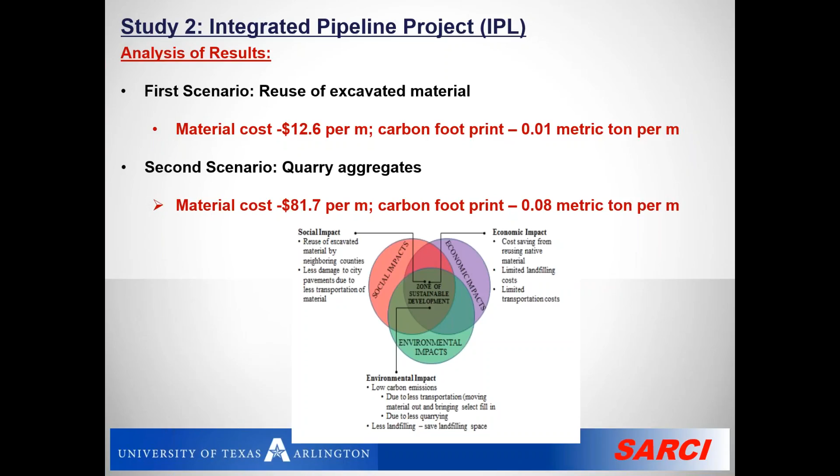They also involved our civil engineering students who evaluated native soils to produce CLSM. So it was mentioned. Our research work was cited in their recommendation for the silver rating. We were very happy, and so again, we showed them sustainability can work. And we can show them with the research, going from theory, to lab, to field. We can demonstrate it in every step.

So again, I feel like this area is something we already know. We are doing quite a bit. One issue I will say is the carbon calculators. If you Google it, you'll find a lot of carbon calculators. You do need independent measurements. Some of these carbon calculators are not necessarily vetted very well, so you need to double check them. So I would recommend you look at it.

I think this is one presentation we're going to have next year. The EU has a research framework that they're developing for hydraulic cements. So I'm interested in that one. Hopefully they'll give a talk next year at our TRB. We are looking at their approach, how they're doing the complete sustainability analysis. Their framework is pretty robust in my opinion, so we are using it.

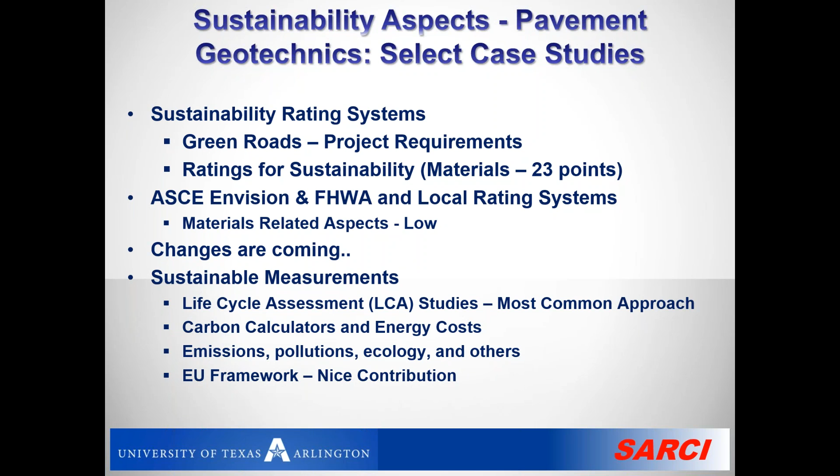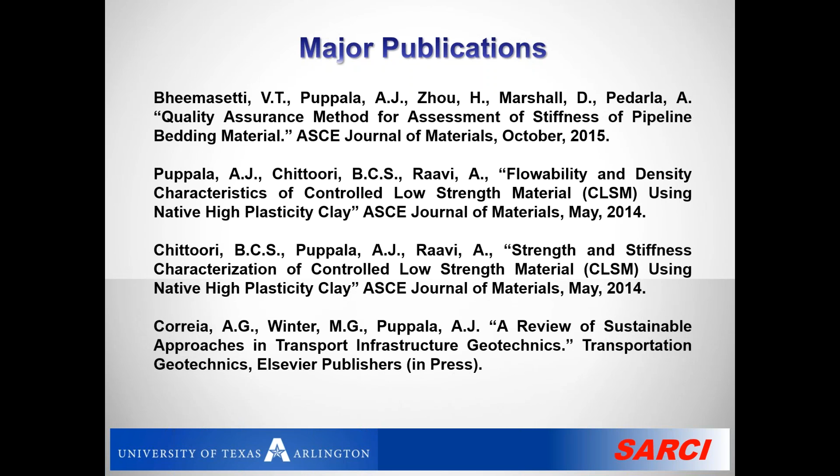Again, I'm part of this ASCE Committee on Sustainability. We worked on this from the Geo-Institute as one of the members, alternate members in the past. They're doing a lot of Envision. Right now we're working on a book, contributing a little bit in one chapter on material reuse. So we see there are a lot of things coming. Hopefully it'll go more. So these are some of the papers on reused material. If there's any interest, this paper just came out. I think you all probably know this paper very well, okay?

So let me just conclude. Again, the characterization is, in my opinion, simple and empirical. What you pay is what you get, right? You do a simple test, you have a failure, you'll spend more money in repairs or even doing more forensics. So spend a little bit more. You've probably heard this several times, but in expansive soil it's very true, okay?

Expansive soil, simple lab, it's not always reliable. We have shown, day after day, this is a bad design. Oh, you underestimated swelling potentials. It's very common for us. So advanced testing is needed, and if you put a little bit of premium, the testing is much cheaper than repairing and doing forensic work and everything. So please look at that one.

Again, in the pavement geotechnics area, there are a lot of opportunities. Please start thinking, how do I get an additional 2 or 3 or one-page section of whatever you have done with respect to sustainability. If you start thinking in that sense, there'll be more and more.

And we did a workshop at the Low Volume Roads TRB conference, a special workshop on sustainability. On Sunday morning, we thought we may have 20 people. We had 85 plus, most of them USDA folks. They do a lot of low volume roads. And we had a topic on geosynthetics and sustainability benefits. Barry Christopher couldn't come, but another person filled in. So it went pretty well, a lot of people are actually embracing this idea. It's pretty good to do this.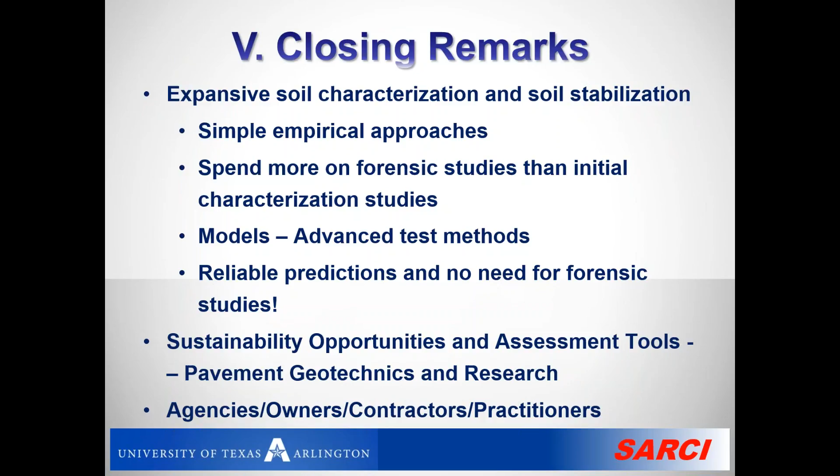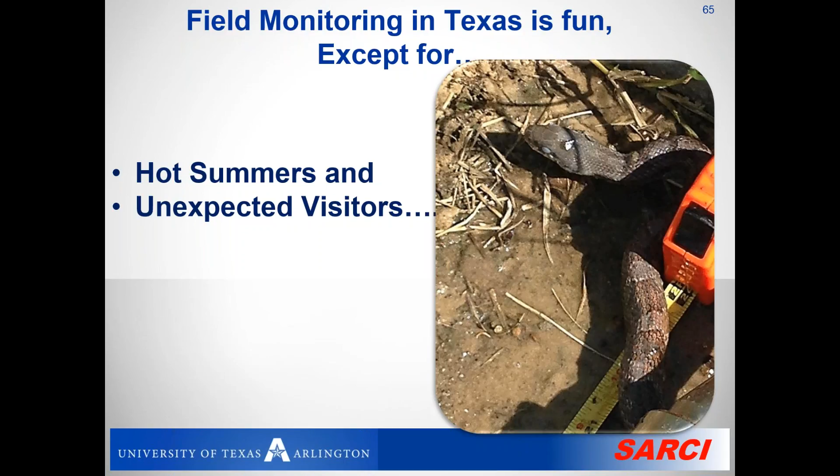Okay, this is something I want to mention in Texas, because we're known for hot summers. We found this snake in one of our inclinometers. I have one of my Thai students, and Thai students are used to king cobras, right? So this guy is pushing the inclinometer. He felt something small, and when he and 2-3 other students pulled it out, the snake was wrapped around our inclinometer. I wish I had that picture. He jumped 50 feet, it seems. Then one of my undergrad students took it by the tail and threw it away. And I learned later when I showed this picture, this was a poisonous snake. And I told them, don't ever do it, because as a faculty, you are responsible.

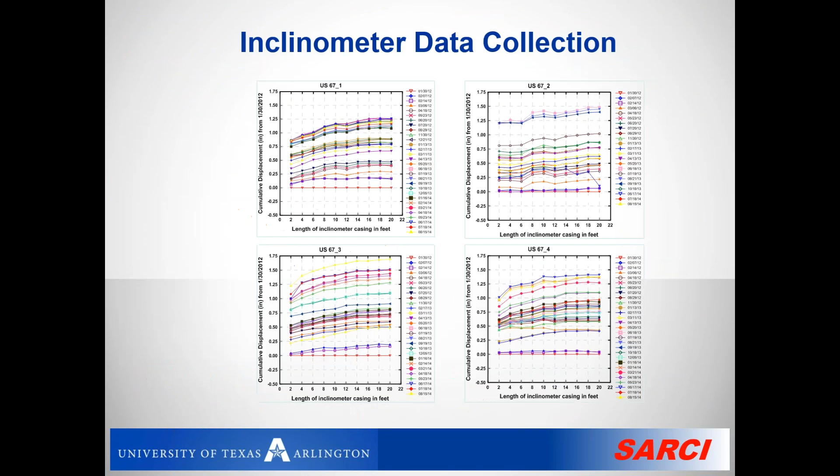He's electronic instrumentation. Hey, he's a vision guy. Machine vision. Great vision.